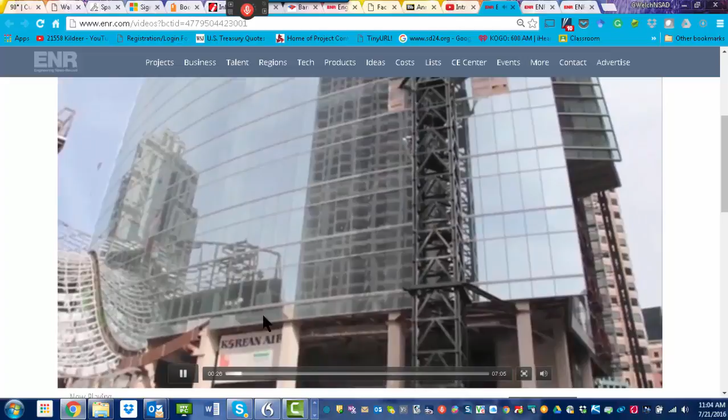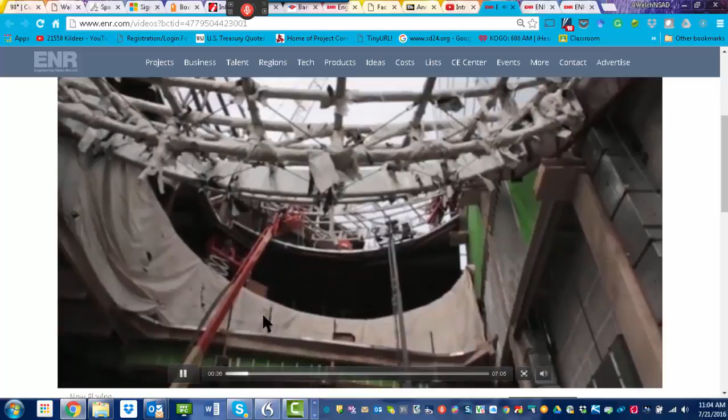Hi, I'm Scott Blair with ENR.com, and I'm here at the Wilshire Grand Center in downtown LA with Mark Turcott from Turner Construction. I'm the tower superintendent on the Wilshire Grand. Thanks for taking some time to talk with us today. So can you tell me a bit about where we're at in the schedule on the project? We are about 14 months from the end of the project. We're 2.5 years in construction. We're almost at the top with the core, and we got one more lift to pour, and we're 2 sequences down, like 4 floors down on the steel. So very close to topping out the building and start focusing on the rough-in and the finish trades.

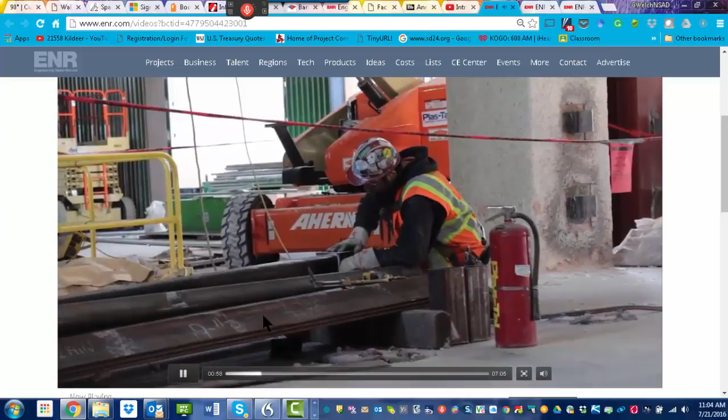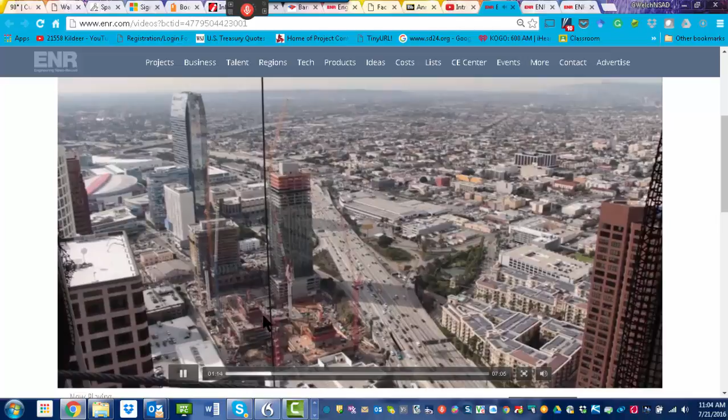So last time I was here was about a year ago, and it seems like you guys made a lot of progress in that short amount of time. Can you talk about the construction pace and some of the strategies you guys are using? A lot of progress, yes. A year ago, all we had that was sticking out past the street was the concrete core. Concrete core was up to level 26, going through the lower BRB. We hadn't really started any steel. We may have just been poking out of the street. Now, 1 year later, the core is just right at reaching the 73rd floor, the top of the building. The steel is on 69, which is again 4 floors from the top of the building, and we got glass up to level 39. There's finishes going inside. The rough-in is in full mode. So it's amazing what a year makes, the difference in a year that we see on the project.

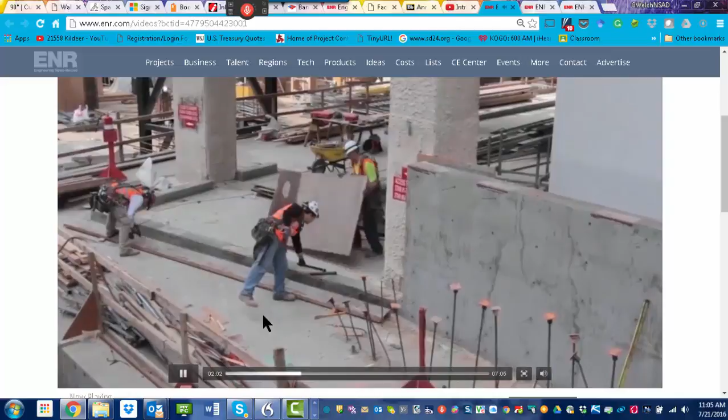Yeah, and as far as sequencing and keeping everybody on target and going towards the finish line, what kind of strategies are you guys using to keep the project organized? It's all about scheduling tools and keeping to the milestones. If you keep aiming just for the end date without looking at the different milestones and the different stages of construction, that's just too much to bear, too much to swallow. So we have paces, number of days per floor, and as we go up, you control where you are, you re-accelerate something if you need to, and you resequence stuff if you need to. But right now we're in a really good pace. We're right where we need to be at the top out, and I'm excited about finishing the project.

Unlike a lot of the buildings I've worked on, and most of the stuff we build around Southern California, this is a 73-story building. You cannot wait till you're topped out to start your finishes inside. Typically you'd go, 5-6-story building, you go to your roof, you enclose the building, you do your rough-in at the same time, and you don't start finishing until you have a roof on top.

73 stories, in order to start finishes before you're topped out, you have intermediate decks where you basically weatherize yourself on the lower floors in order to start finishes and keep the train of activities going. So we're at level 28, which is the anchor point for the lower BRB of the building. BRB, buckling-restrained brace, it basically keeps the building like a skier with ski poles.

The challenge about the lower BRB, what I thought was the biggest challenge with BRB at the onset when we approached the project, was the size of the embed on which the BRB is anchored into the core wall. So that BRB is anchored on a 36-foot tall embed. So if you can picture pouring the core wall in lifts, right, and we have 14-foot lifts.

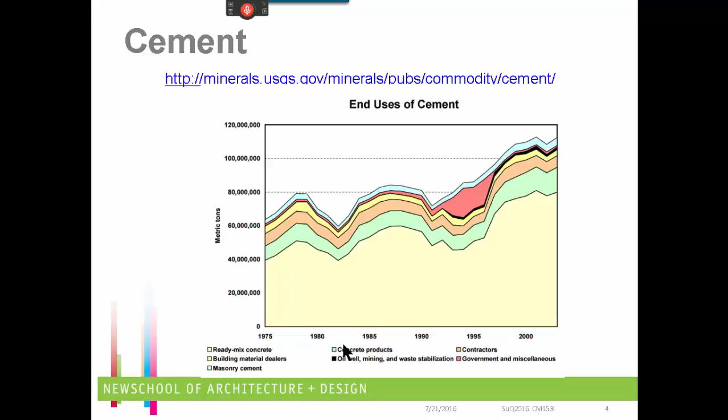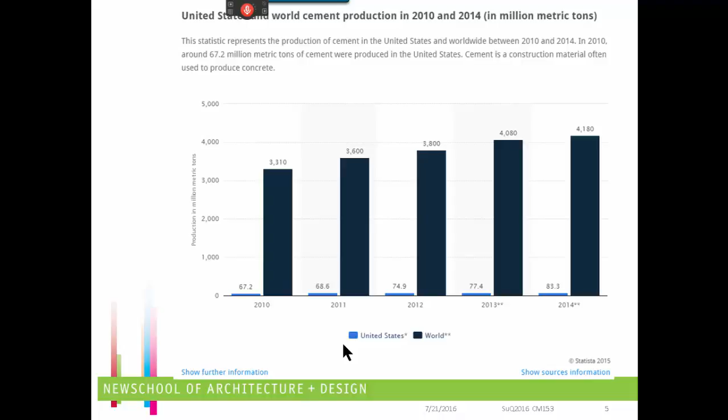So when you think about the uses of cement in the world, interestingly enough, we are just a minuscule portion of it in the United States. And we use it for buildings, we use it for concrete masonry units, we use it for highways, we use it in all sorts of different ways. But the consumption of cement around the world is really quite significant.

There's a couple more links that I have here to articles that are in the folder so you can take a look at them, but they are articles that talk a little bit about how the amount of concrete that needs to be moved for major projects can lead to the need to design even custom equipment to both mix, carry, and place that concrete.

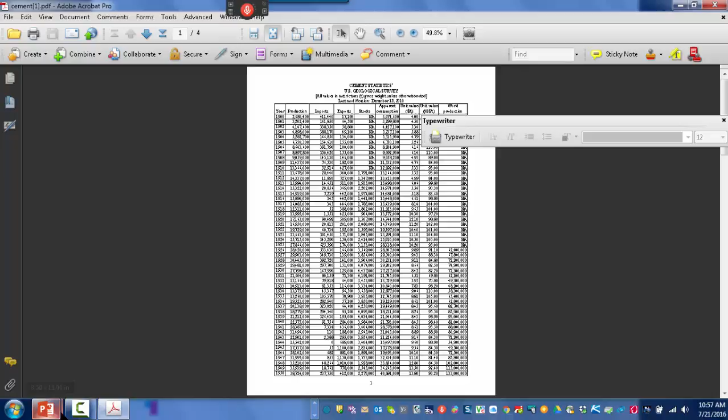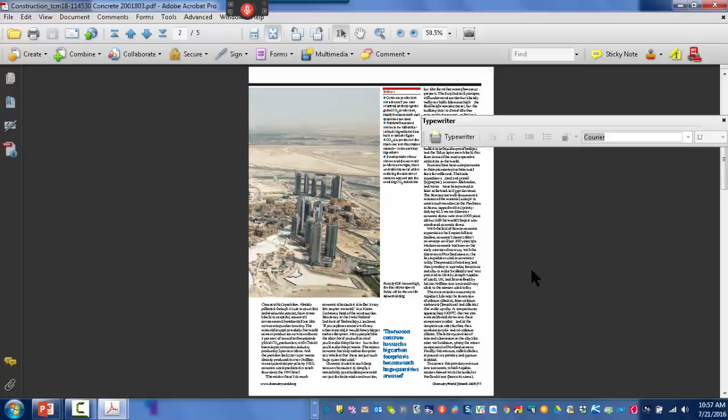So I've given you a couple different links in here, and there's a couple different files that are in the folder that talk about not so much the difference, but the various uses of concrete throughout the world. I think they are interesting to read. Take a look at them, and they'll give you some good background on what we're doing.

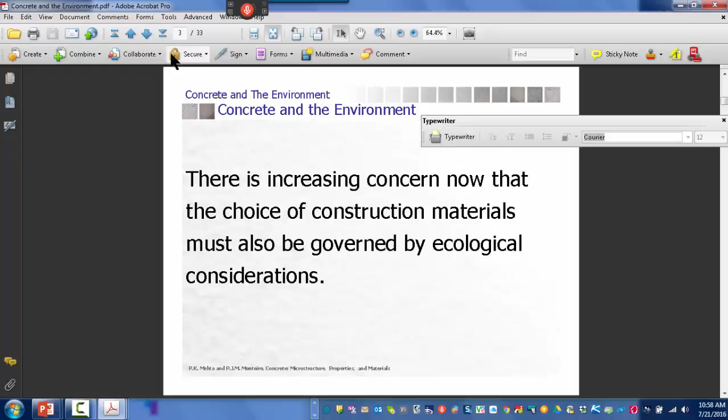Concrete and the environment is a very interesting slide deck. It talks about how the volume of energy that is required to produce the cement, and then when you add that to the amount of energy that goes into the mixing of cement into concrete, the transportation of that, and the movement of that material to the job sites, it is becoming a concern for the environmental impacts of all of the use of this cement. So I'm kind of just clicking through these, but take some time and go through this deck of slides yourself. I think you'll find that it is intriguing to see some of the issues that it brings up.

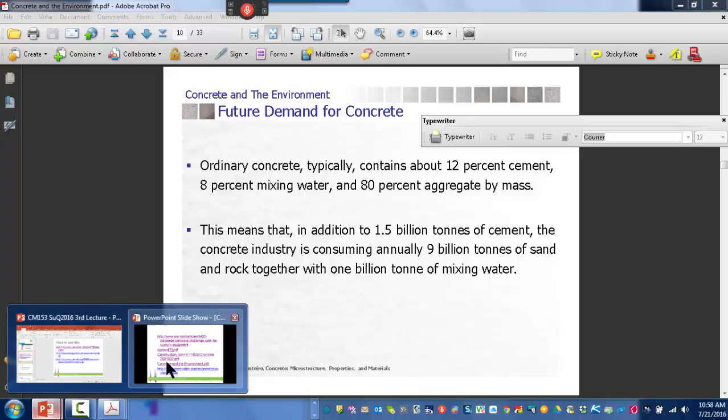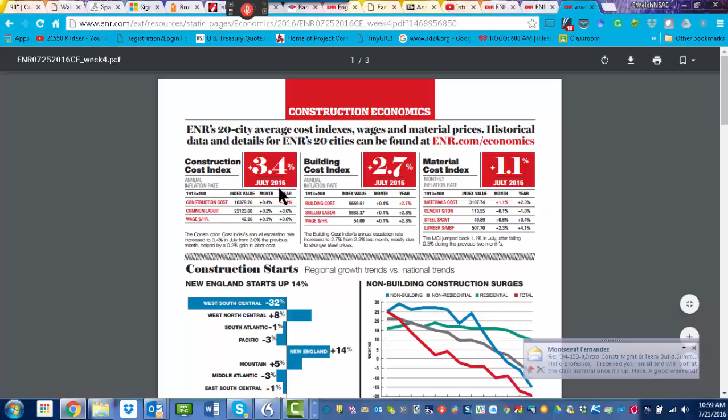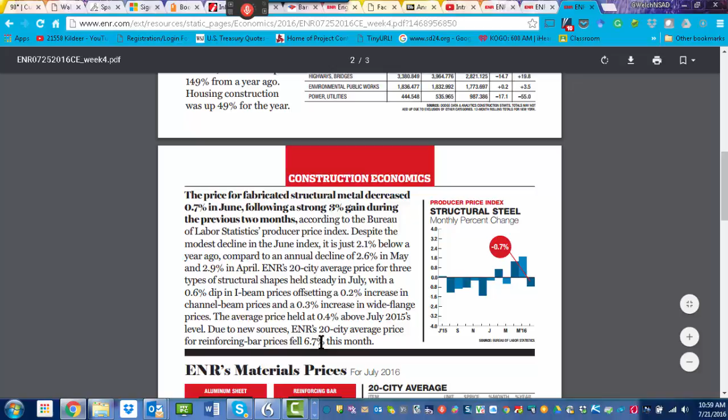And last, the economics you can look for in ENR.com. Remember how I've mentioned that ENR.com is really an important resource for you in this class. You'll be able to actually see the archives of where building material prices are today. You can look at them going back, but they actually have a weekly issue of the Economics Weekly that talks about the cost of the various building materials that are out there. Once again, a resource for you to use and a little bit to learn about. So let's get back into the slides here and see what's next.

Oh, this was an interesting infographic that I found. In 100 years, from 1901 to the year 2000, the United States used 4.5 gigatons of cement, 4.5 billion tons of cement. In China, in the 3 years from 2011 to 2013, China used 6.6 gigatons. So in 3 years, they used about 140% of what we did during the entire 20th century. So you can see that the cement usage is much greater in other parts of the world.